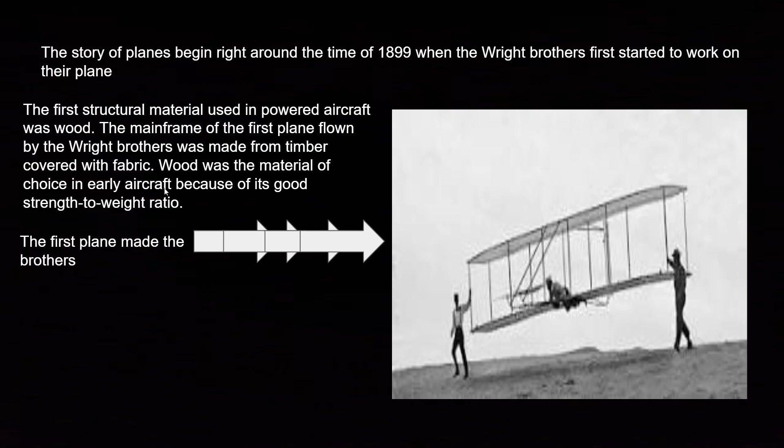Now this doesn't have to do much with chemistry, but it does have a lot to do with physics. They needed something that was light but durable, and because timber is wood, wood has air in it. It's kind of like how a bird has hollow bones, so it can fly easier. The fabric was, I guess, to be soft, I'm not really sure why they chose fabric. But the wood was chosen in the early aircraft because of its good strength to weight ratio.

The beginnings of flight. To reiterate, the engineering of the first plane began around December 1899 with the Wright brothers.

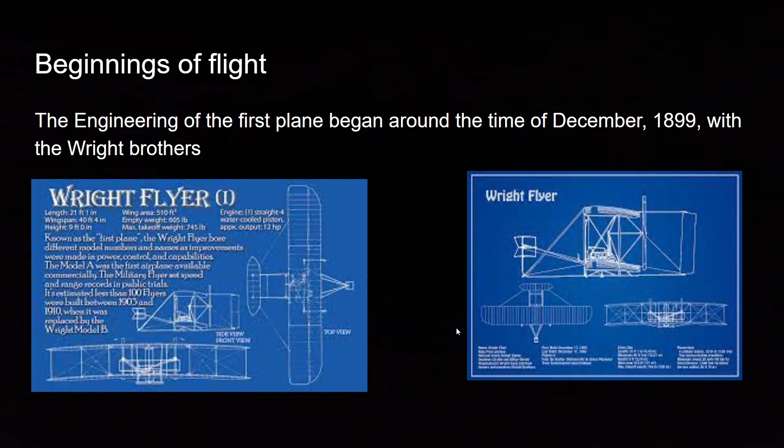Now, that little hang glider is almost nothing compared to the beauty of modern day aircrafts. Excuse me, sorry, I had to sneeze almost. But the beauty of modern day aircrafts is outstanding.

Modern day engineers are involved primarily in designing the aircraft and the propulsion systems, studying the aerodynamic performance of the aircraft, and construction materials. Now, the construction materials can vary, but most planes are made out of metal, a special type of metal. And the performance of the aircraft relies on the combustion chamber, how that works. I'll show more of that later, because that's kind of how planes fly. That's where all the chemistry is involved.

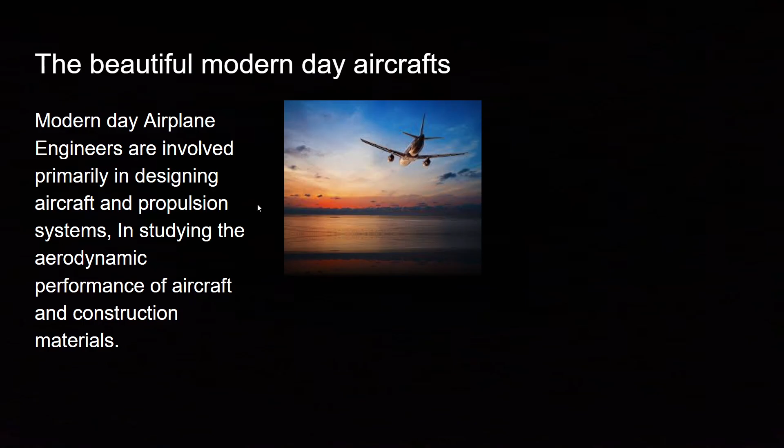However, the designing of the aircraft is solely based on, for commercial airliners, how many passengers can be fit in, and for jets, how fast you can go, just depending on the aircraft exactly. But most of it is designed purely for flight and for the physics of the plane to allow flight.

All aspects of aircraft science and technology are areas of expertise for aircraft engineers. They conduct research, design, and development work on the parts and machinery that aircraft use to operate. Utilizing software and computer-aided design, they combine technical know-how with software skills to exhibit models. As an aircraft engineer, you would assemble, test, and modify engines and other support equipment for a variety of plane types.

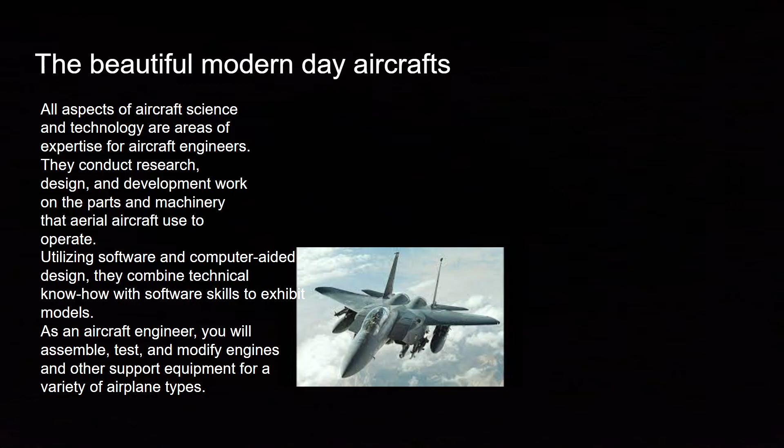Now, according to Google, the top six most impressive feats of aerospace engineers are: number one, the invention of flight, flying. Number two, the first person in space. The Apollo program, the Voyager probes, reusable rockets, and the solar impulse.

Now, most airplanes today are made out of aluminum, I know I get made fun of for saying it like that. Aluminum is a strong yet lightweight metal. The Ford Trimotor, the first passenger airplane from 1928, was made out of aluminum. The modern Boeing 747 is an aluminum airplane as well. Other metals such as steel and titanium are sometimes used to build aircrafts. These metals are also used for their strength to weight ratio, like the wood in the very beginning of the plane's history.

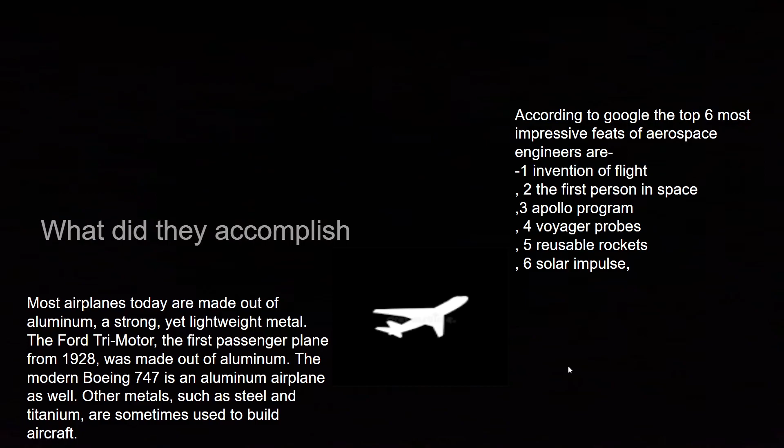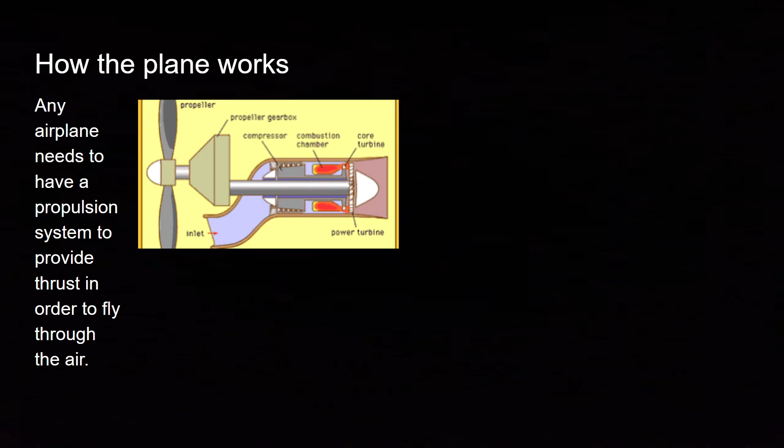Now, how the plane works. Any airplane needs to have a propulsion system to provide thrust in order for the plane to actually fly through the air. The Wright brothers' internal combustion or piston engines, as well as contemporary jet and rocket engines, all rely on burning to generate the power that shoots the plane into the air itself.

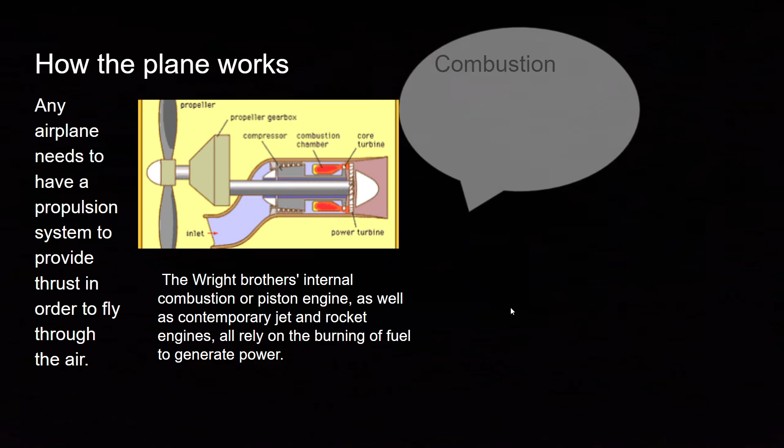Here we have the propeller, which sucks in the air. You have the propeller gearbox that turns the propeller. Here's the inlet where the air actually comes into it. The compressor compresses the air like crazy into super dense pockets of oxygen. Once the oxygen is super dense, it goes into the combustion chamber.

The combustion chamber gets sparked, and all of that air - as you know, fire loves oxygen. It basically eats it, needs it to survive. So what happens when you feed something a lot of what it eats? It gets bigger, right? It gets stronger, faster. This is basically how it works with combustion.

Once you feed the fire all that super condensed air, it explodes into these insane kind of explosions. They're powerful, but they're dense. Now, those dense explosions go into the core turbine, and from here they go into the power turbine, causing the plane to fly through the air. This is what powers the actual plane itself.

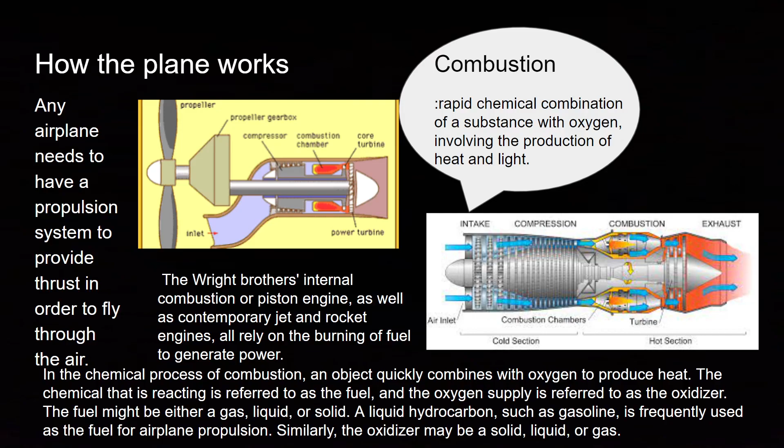In the chemical process of combustion, an object quickly combines with oxygen to produce heat. The chemical that is reacting is referred to as the fuel, and the oxygen supply is referred to as the oxidizer. The fuel might either be a gas, liquid, or solid, and a liquid hydrocarbon such as gasoline is frequently used as fuel for airplane propulsion. Similarly, the oxidizer may be a solid, liquid, or a gas.

Sorry, I think I'm coming down with something.

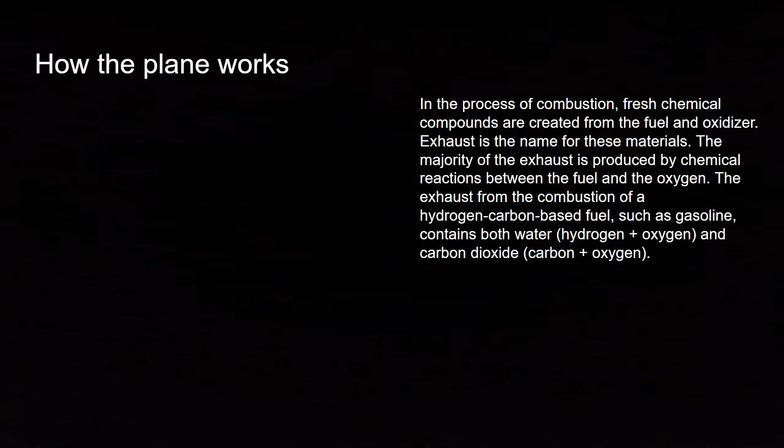In the process of combustion, fresh chemical compounds are created from the fuel and the oxidizer. Exhaust is the name for these materials. The majority of exhaust is produced by the chemical reactions between the fuel and the oxygen. The exhaust from the combustion of a hydrocarbon-based fuel, such as gasoline, contains both water - hydrogen plus oxygen - and carbon dioxide, which contains carbon plus oxygen.

Now, the oxidizer used in aircraft propulsion is air, a gas. For combustion to take place in an aviation engine, we must vaporize the fuel, because the oxidizer is a gas and the fuel is a liquid. The evaporation and mixing of the fuel and air occur in the carburetor of the engine. The combustion itself occurs in the combustion chamber.

Other elements that were present during the combustion may also be present in a chemical combination in the exhaust: nitrous oxides, NOx - nitrogen plus oxygen - can also be produced when gasoline is burnt in air, which has a 21% oxygen content and a 78% nitrogen content.

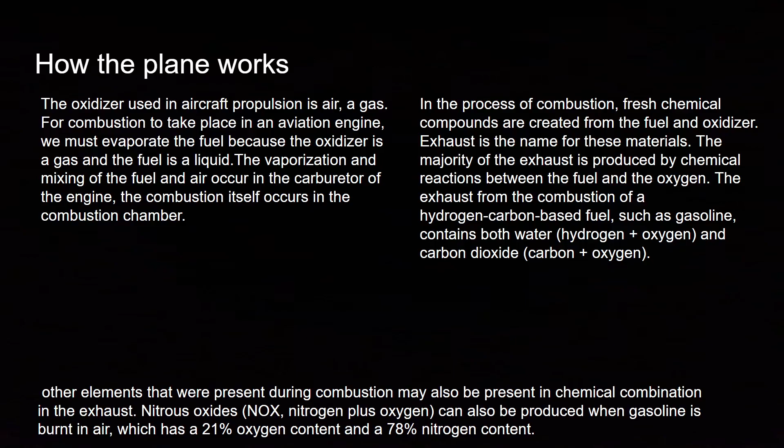Due to the high temperature from the heat emitted, the exhaust is typically in the form of a gas. However, some exhaust can develop as liquid or even solid, for instance soot, a type of solid exhaust produced by several combustion processes. That is all for my presentation. I hope you enjoyed.